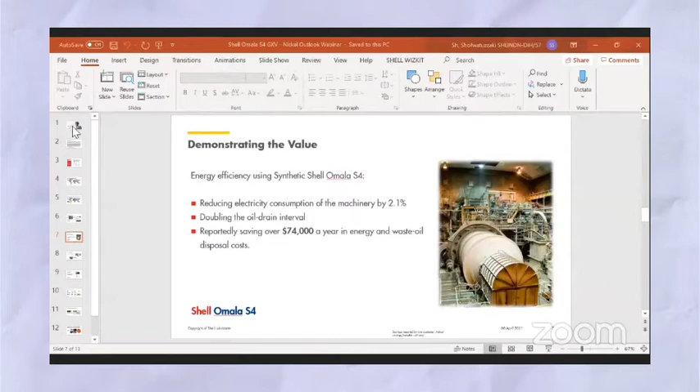Yeah. I will share my screen. Please let me know if you have already seen my screen. Yeah, it works. Okay, let me see first. Sorry. Okay. Okay.

So I will present a bit about the common challenges faced by industrial maintenance, including the nickel industry, and how Shell developed the solution to overcome those challenges. At this moment, as we see, most industries have common challenges. They have to be more productive with higher efficiency and also lower carbon emissions.

So the challenges are not only economic or commercial, but the challenges also come from environmental challenges. On the other hand, in terms of mechanical or maintenance challenges, reliability of equipment is a key factor to ensure the continuity of the operation in the field.

These challenges have been addressed by the equipment manufacturers, or we could say OEMs. In this presentation, I take a specific case from industrial gearboxes, where by taking advantage of advanced metallurgy and manufacturing methods, the design of industrial gearboxes is getting smaller with the same power transmitted. That means the gearbox load now becomes harder than before. And it also impacts the lubricants, where the oil stress is becoming higher and higher.

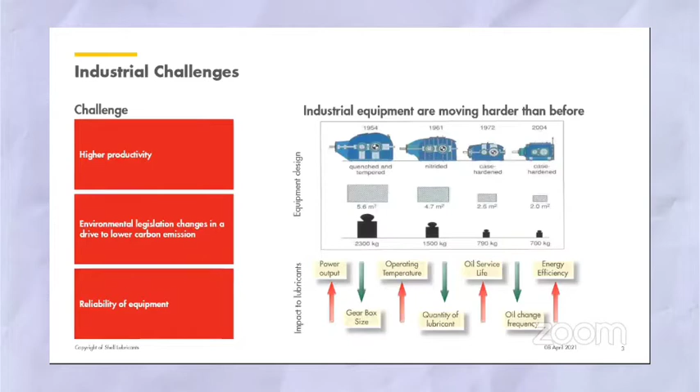Due to the rapid development of gearboxes, major OEMs now depend more on their own internal lubricant standards and approvals rather than relying on industrial oil standards. At Shell, we have 4 lubricant technology centers that geographically mirror the spread of major OEMs. This allows us to have collaboration or partnership with OEMs.

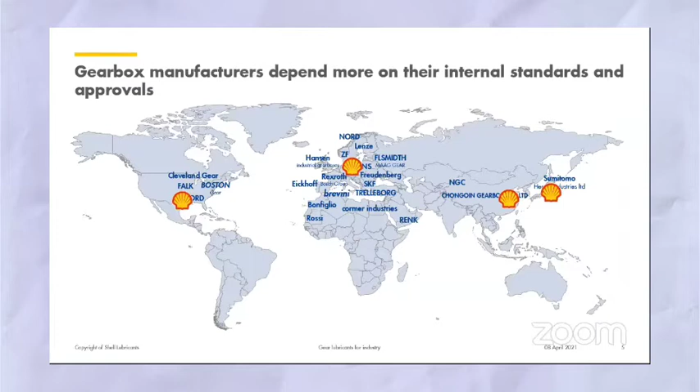The type of partnership can be in the form of Shell developing solutions or products that meet the OEM standards, or Shell developing the solution and testing method that can be adopted by the OEMs, or Shell doing co-development with the OEM, where the intellectual property of the hardware belongs to the OEMs, while the intellectual property of the lubricants belongs to Shell.

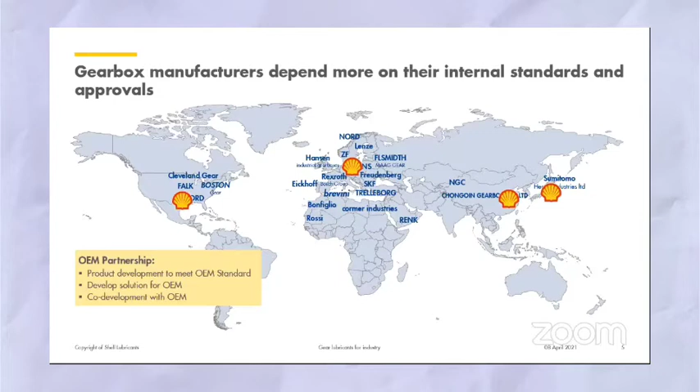I will take a couple of examples of how Shell developed solutions for specific challenges. One example, if we talk about energy efficiency challenges, we see that from the design of the gearboxes, there are oil properties that can contribute to energy losses. The first one is frictional losses, and the second one is churning losses due to thick oil viscosity.

So by reducing the frictional losses, the temperature of the oil will also be reduced, and it allows us to use thinner or low viscosity oil. So it will also reduce the churning losses. So by design, if we can develop oil that has low frictional losses, then we can reduce the energy losses.

So we develop the formulation, and we test it in a screener test before actually testing it in the rig test, because the rig test sometimes takes a long time and also has a high cost. So to manage the cost, every formulation that will undergo the rig test has to pass the screener test, so we can manage the development cost.

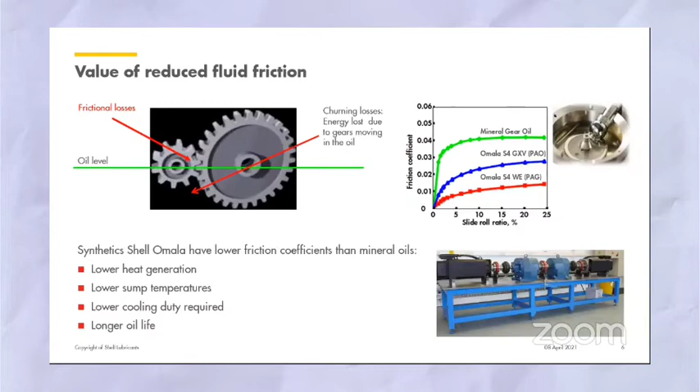And after development, we also demonstrate this value in the field. This is one example in a mineral processing plant in Australia, where by using synthetic Omala S4 gear oil, they can reduce the electricity consumption by about 2.1%, and also double the oil drain interval. So they can also reduce the disposal cost of the lubricant. So in total, in a year, they can have a saving of about 74,000 USD.

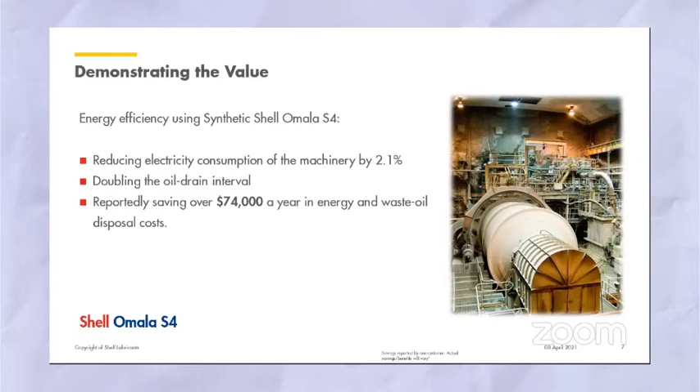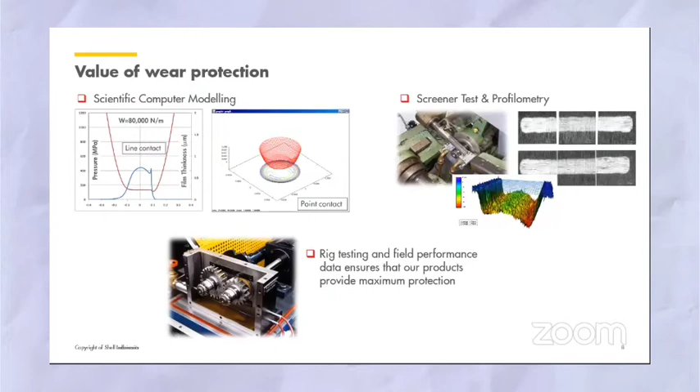Another example is how to increase unit reliability. So first of all, we do computer modeling of the contact in the gears, and then we develop the formulation that can cope with the contact patterns, and then we do screener tests, and after they pass the screener test, we do rig testing and also field testing of the formulation. After we develop this formulation, we can apply it at the customer side.

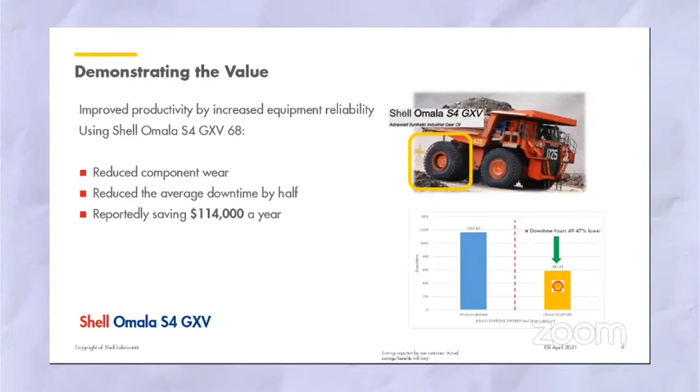So that's how Shell develops solutions for specific challenges in industry. We define the problem, we design the solution, we develop the solution, and we demonstrate the value at the customer side.

Shell has a wide range of products for industrial maintenance. We have Shell Omala for industrial gear oil, Tellus for hydraulics, up to specialty oils such as fire-resistant oil, and also biodegradable lubricants, what we call Shell Naturelle. And we have more than 2,000 OEM approvals and listings, showing that we have closely developed our products together with the OEMs.

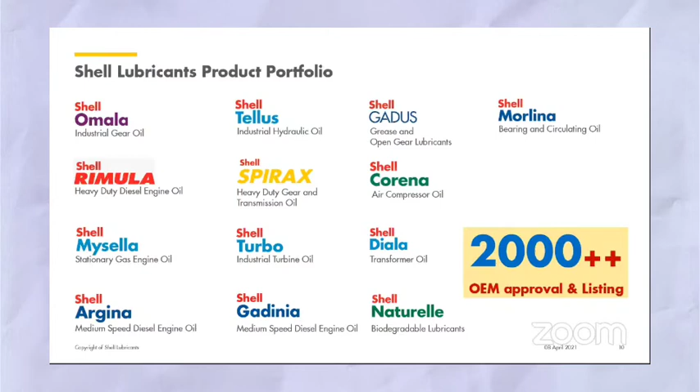And specifically for mineral processing plants in the nickel industry, we have a complete product portfolio, from heavy lubricants for ore mining to factory plant maintenance lubricants for smelter plants. We have the complete product portfolio that can support the industry.